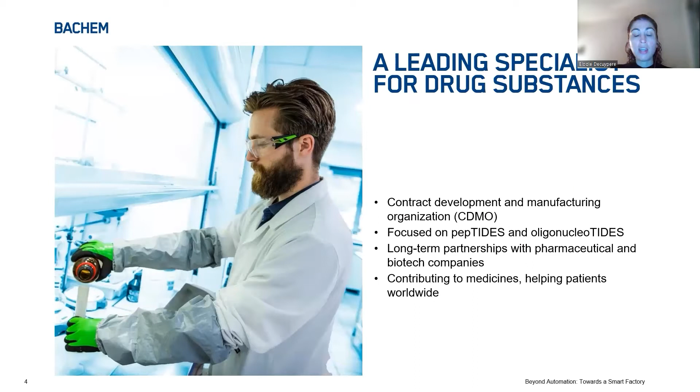Before we get into the topic, let me introduce Bachem. Bachem is a leading CDMO for peptides and oligonucleotide API manufacturing. Our success is based on long-term partnership with pharmaceutical and biotech companies to help them in contributing to medicine and ultimately helping the patients worldwide.

As a leader in our field, our success relies also on 5 strategic foundations. For today, we will emphasize in particular 2 of these 5: innovation and technology, because we aim to work with our customers to get the best solution for modern manufacturing. It is really important to us to continuously improve and keep a technological leadership. The second pillar we will highlight today is operational excellence and quality. At Bachem, we have a strong tradition of quality and efficiency, and for this and for our customers, we want to set high industry standards.

Bachem is a global company, and we are growing really fast. These past few years, we experienced an increasing demand for peptide projects as well as volume for this molecule. To address this and to meet the market demand, we invested heavily into new capacity and capabilities. End of last year, we obtained a capital increase, and we started the expansion and construction of new peptide manufacturing facilities. Our new building and equipment train for large-scale manufacturing of peptides will be ready by 2024. And in addition, we bought a new site in central Switzerland, in Eiken, that will be operative in 2030.

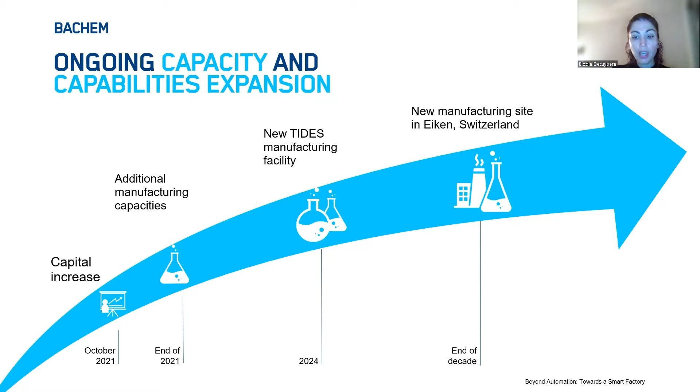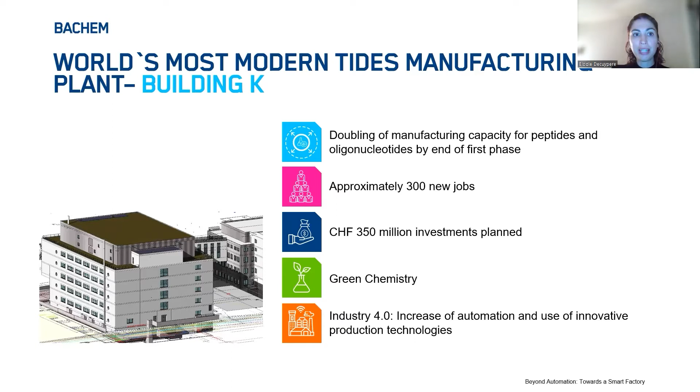With our new building under construction at our main site of Bachem at Bubendorf in Switzerland, when the first phase of commissioning is completed, we will already have more than double our manufacturing capacity for peptides. And when this building is fully operative, we'll be able to create 300 new jobs. We invested 350 million in this building with a particular focus on sustainability, with the implementation of green chemistry processes, as well as automation and digitalization, as you can learn later in this webinar with Patrizia. With this, I would like to thank you, and I hand it over to you, Patrizia.

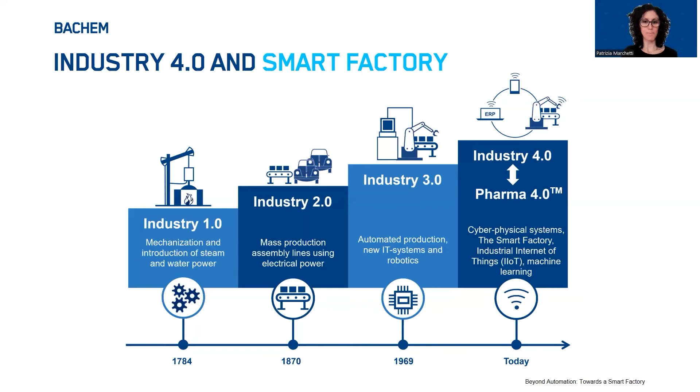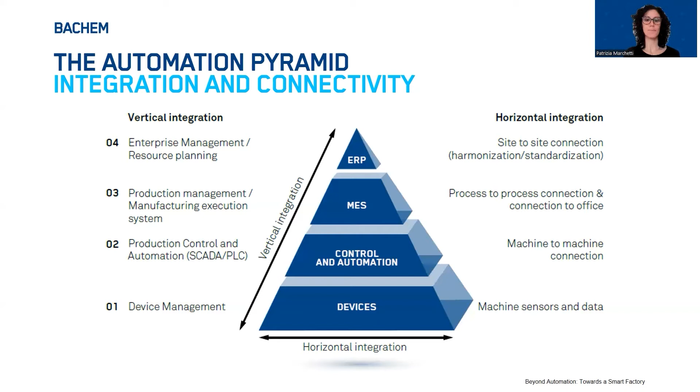At what we can consider the beginning of our journey, our production processes were either manual or semi-automated. In the semi-automated processes, some steps could be carried out without human intervention, and these steps were supervised by SCADA systems.

The data generated during the process was saved on local machines, which means it was very decentralized in so-called data silos. We introduced a few years ago a new enterprise resource planning system to support the management of our core business processes. We also introduced a laboratory information management system to support the operations of our laboratories and digitize the documentation towards a so-called paperless lab.

We have introduced process analytical technology in some of our processes to perform inline analytics and in this way streamline the processes. We will see one example later in this webinar on how we have applied PAT to substitute manual in-process controls. We continue with MES, Manufacturing Execution System.

This was implemented to digitalize the operation network and introduce digital recipes and paperless documentation. We will also see more about this later in this webinar.

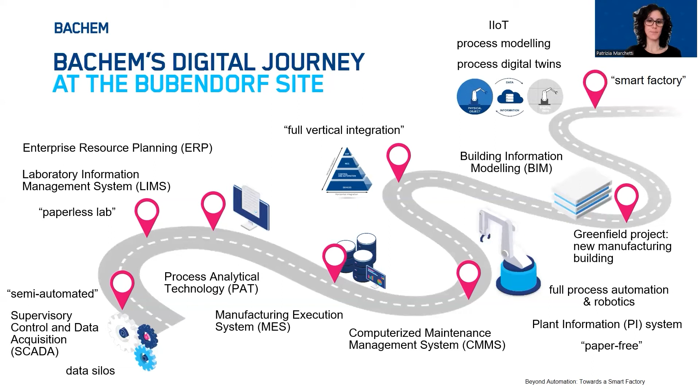I will start now presenting the project on automation and digitalization of the solid phase peptide synthesis. We selected the SPPS process as one of the first case studies for automation and digitalization because of its high business impact. SPPS is the core technology for us at Bachem for the manufacturing of both peptides and oligonucleotides, or shortly referred to as tides.

Peptides consist of chains of amino acid derivatives linked by peptide bonds. The desired peptide is obtained through successive reactions of the amino acid derivatives, one at a time, on an insoluble resin support.

The process consists of highly repetitive cycle operations, which take place in two main reactors: the SPPS reactor and the activation reactor. In the SPPS reactor, we perform the synthetic steps of deprotection, coupling, and acetylation, while in the activation reactor, we prepare the amino acid solution, meaning we solubilize the amino acid derivative and activate it prior to transfer to the SPPS reactor for the coupling step.

In this project, we targeted the mid-commercial GMP scale, so we are talking about 150 liter vessel size.

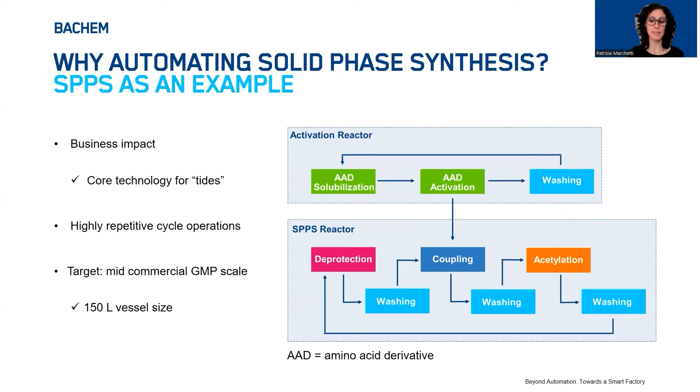The new fully automated process shows several benefits with respect to the state-of-the-art process. In the new process, operations are carried out with minimal human intervention. Specifically, we take time-consuming repetitive tasks out of employees' hands and let them be performed by machines. In this way, we allow employees to focus on higher value activities.

As a further benefit, the process is more reliable, reproducible, and safe, as we reduce the risks of human error and let machines perform critical or unsafe tasks. Equipment utilization is improved as we can use the machines 24/7 and over weekends. And thus, as a consequence, operating and personnel costs are also significantly reduced.

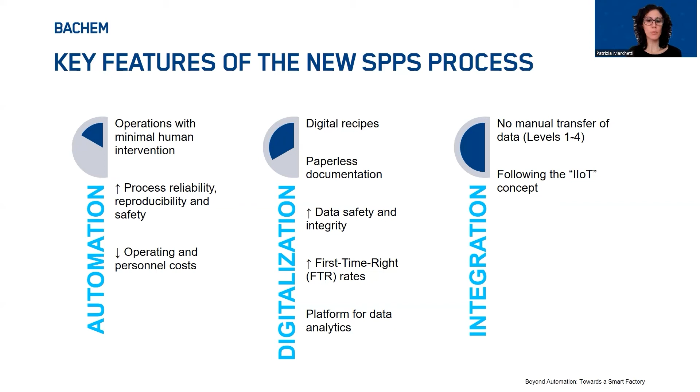By digitalizing our processes and digitizing data and documentation, we ensure higher data safety and integrity, we achieve higher first-time right rates, and we create a platform for data analytics. Through the interfaces between systems, data is transferred fully automatically, meaning that also these tasks, usually performed by operators, are now performed by machines.

Let's see now what we did, starting from the factory floor. From now on, you will find a small pyramid in the top right corner of the slide showing on which level we are. During the presentation, we will go from bottom to top.

On the factory floor, we introduced all required devices and controllers to perform all process steps. The controllers are supervised by two SCADA systems. Among the several steps, we found that the most challenging ones for automation were the steps handling powders, such as in our case, the solubilization and activation of the amino acid derivatives.

Before this project, these steps were performed completely manually. This means that an operator was manually transferring the powders from a bag into the activation reactor. To automate these tasks, we introduced one of the major innovations of this project, the first Bachem robot operator. We call it BALU, which stands for Bachem Amino Acid Loading Unit.

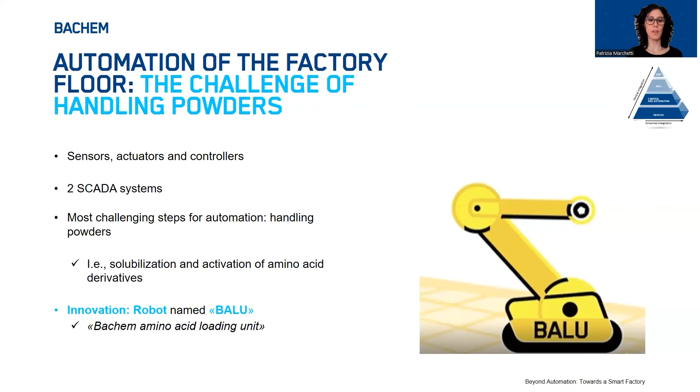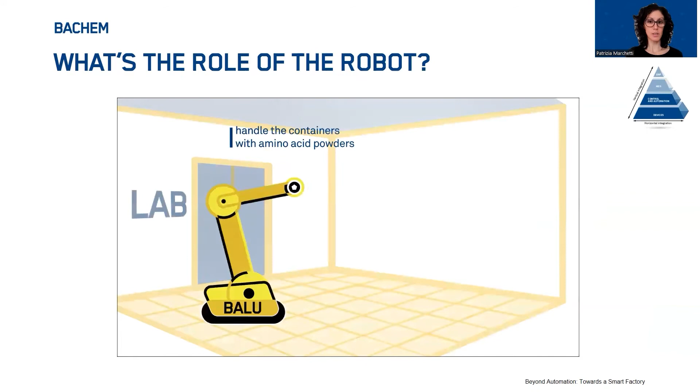So let's see what BALU does in detail. BALU can handle the containers with the powders, perform the powder transfer into the activation vessels, clean the amino acid transfer port after the powder transfer to prevent cross-contamination, and on the side, assist with the storage of clean and empty vessels.

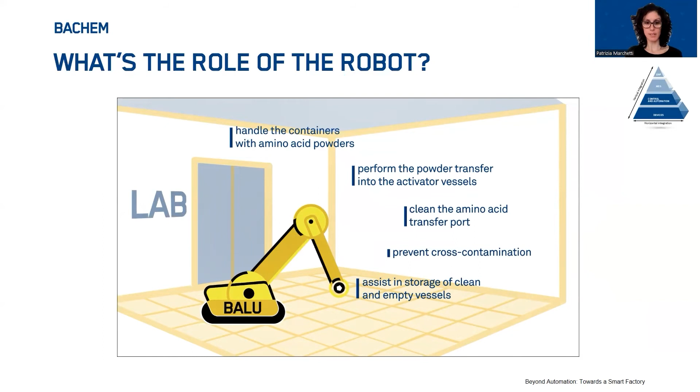Process Analytical Technology, or PAT, was also fundamental to achieve full process automation. We use PAT to monitor critical process values directly online and eliminate manual in-process controls. Manual in-process controls consist of several manual activities performed by operators on the factory floor and analytical chemists or scientists in quality control. Furthermore, they require the process to be paused.

On the other hand, by integrating inline sensors with the process control system, we can perform our analysis without interrupting the process. Specifically in this project, we successfully introduced PAT to verify that the starting materials have been completely solubilized, and that the starting materials or other critical reagents have been fully washed out from the reactor after specific synthetic steps. Thanks to PAT, cleaning cycles can also be automatically repeated if necessary.

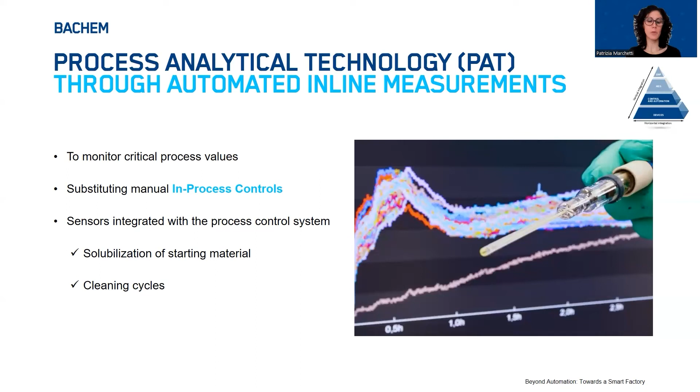We are now on level 3. On level 3, we use the PAS-X suite as a manufacturing execution system. With this software, we can define end-to-end processes, meaning from the dispensing of the raw material until the packaging of the final API. In MES, we make use of 2 specification types: master batch records as digital recipes for target materials, and equipment-related specifications for the management of equipment types.

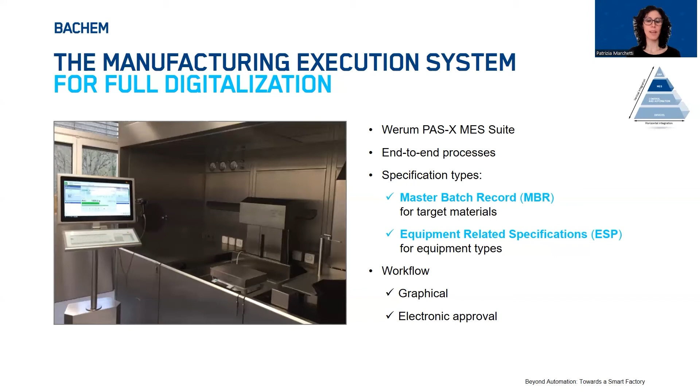These specification types substitute paper batch production records. MES features graphical workflows, which we design, approve, and execute fully electronically.

During the execution of the process activities, MES records all GMP-relevant batch data, such as process values, events, and alarms. Everything is documented in the electronic batch record, or EBR, which contains, beside header data, also information about the bills of materials, the basic recipe, and the equipment used.

One of the most impressive advantages of the EBR is the lean and faster review by exception process. This means that only exceptions are reviewed in the final batch documentation and not the whole batch documentation itself, as is the case for the traditional batch records.

To understand this with numbers, for the paper batch documentation, we need 2 to 3 production persons for the execution and 1 or 2 QA persons for review and release. For the EBR, we need 0, unless deviations occur.

In MES, we predefine exception types so that the system itself can automatically create the exceptions during process execution. And we can review exceptions in real time, meaning while the process is still running, for an even faster batch release at the end of the process.

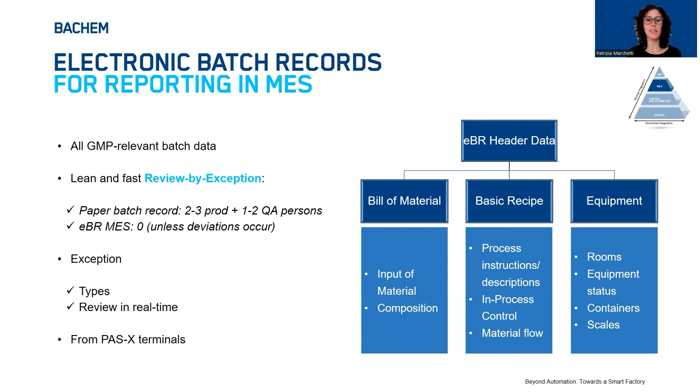During process execution, MES performs automatic status checks at specific time points of the process, as we define in the digital recipe. This ensures that we do not use dirty or non-calibrated equipment for subsequent production steps. With MES, we can also track the training status of the operators using the machines.

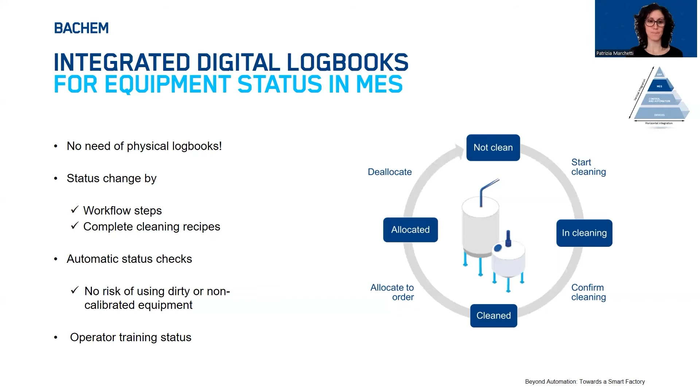After designing level 2 and level 3, so SCADA and MES, we had to plan the interface between the two and make some choices regarding the tasks of the two systems. The main question here was, how can the two systems work together to guide the process from the beginning until the end, so meaning from the coupling of the first amino acid until the coupling of the last amino acid, without any manual input along the way. In other words, the question was, how do we handle recipes?

To answer this question, we defined a 2-level approach consisting of an MES global recipe, the MBR, and several SCADA partial sub-recipes. The MES global recipe leads the process control system by triggering the SCADA partial sub-recipes, so starting them, and receiving information from them when completed, so that MES can start the next one. This is done for all the steps within one cycle to couple the first amino acid, and then for the second one, and then for the last one until the desired product.

The SCADA partial sub-recipes are defined independently from the batch, so they are modules usable for different batches. Examples can be deprotection, coupling, washing, and so on.

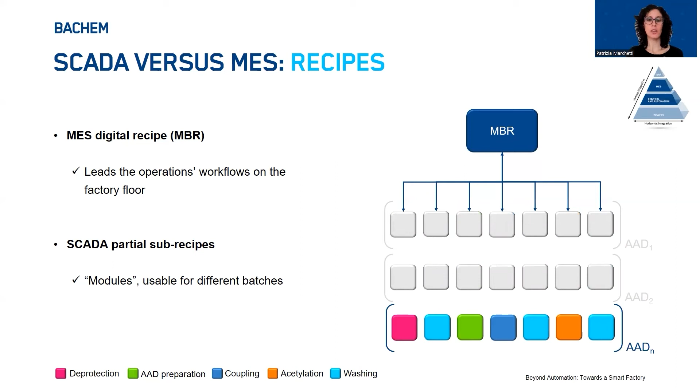SCADA sub-recipes need three types of parameters to perform their tasks. Basic function parameters, which are used by a specific SCADA sub-recipe, and global function parameters, which are global for all SCADA sub-recipes. These two types of parameters are batch specific and therefore defined in the MBR in MES and later transferred from MES to SCADA. Machine parameters, on the other hand, are system specific and are therefore set directly in the SCADA software.

We define tolerances for critical process values and alarms for exceeding these tolerances. Alarms are categorized by defining priorities. So we define which alarms have to be addressed immediately and which ones could wait. And also we define who is responsible to jump in if they happen.

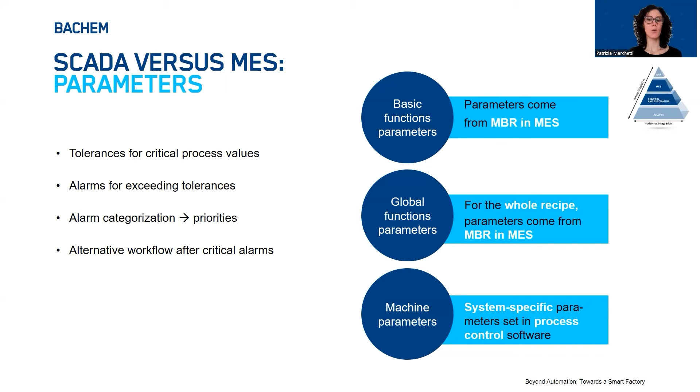In SCADA and MES, we have also created alternative workflows to be carried out after critical alarms, such as automatic emergency procedures.

For the cGMP management of our operations data, we use a plant information system, PI, or data historian. The PI system allows for real-time logging and long-term archiving of process data coming from the SCADA system. PI has interfaces with both SCADA and MES, with SCADA to receive the process data, as we just said before, and with MES to make data available so that MES can generate the electronic batch documentation.

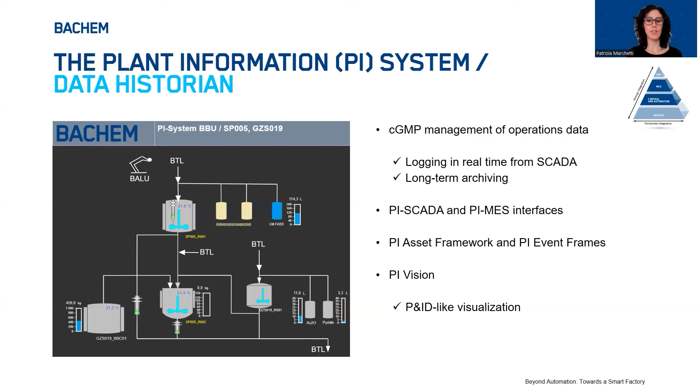In PI, we use the asset framework to organize and structure our data and the PI event frames to capture process events. We use PI Vision for remote monitoring of the factory floor so that we can comfortably visualize the plant, the equipment, trays and the rooms at any time from our office. And this through a P&ID-like user interface.

So in detail, on the Historian platform, we save all information needed by MES for the electronic batch record, but usually much more. So we save all set points, actual values, tolerances, alarms and warnings, deviations from the main recipe, such as emergency washing steps or manual emergency interventions.

We access this data for trending and batch-to-batch comparisons and generally for data analytics. So for example, to perform root cause analysis or a continuous process verification. We are also preparing interfaces for connection with external systems through which our customers can get real-time access to their batch data.

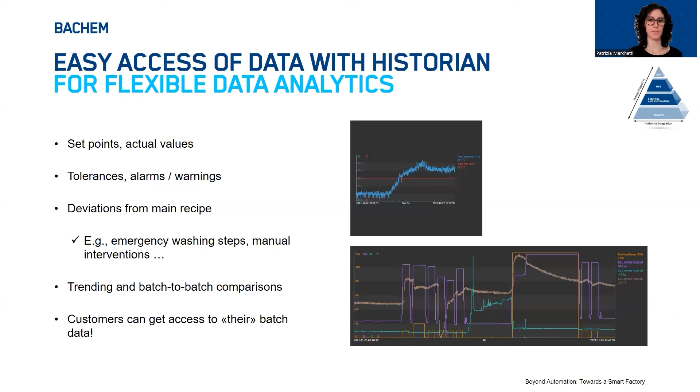At the top of the pyramid, we reach full digitalization by connecting the MES to our ERP system, SAP. Thanks to the interface to SAP, we can perform material verification by scanning barcodes. This allows us to check information on the material, such as material and batch numbers, batch status, and expiry dates, eliminating the risk of material loss or mix-up.

Furthermore, in SAP we execute process orders and create bills of materials. Thanks to the interface between MES and SAP, we can perform automatic takeout. During process execution, material has to be booked out when consumed. With a manual process, often two persons are needed, one entering information and one witnessing it. This brings risks of manual entry errors or rounding inaccuracies. So MES can do that automatically, having access to information on material consumption from the historian.

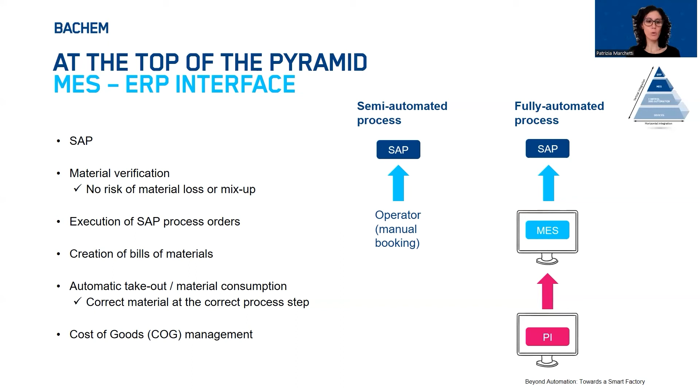In SAP, we also manage the cost of goods for our products.

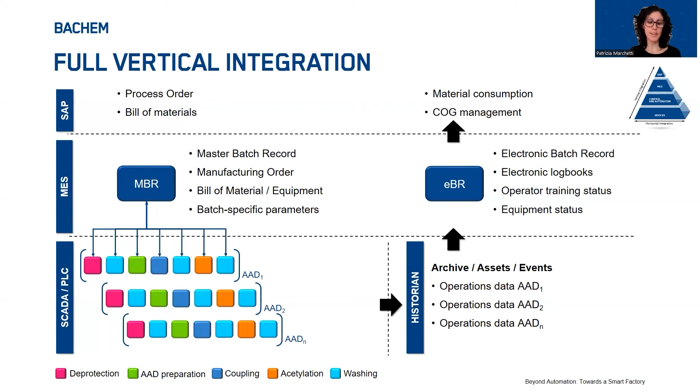This is how the full vertical integration of all the systems discussed so far looks on one slide. We go from the process order in SAP down to the MBR and the manufacturing orders in MES. MES then leads the operations workflow on the factory floor, which performs the required process steps to synthesize the desired product. Operations data is archived, organized, and visualized in the historian and made available to MES to generate the batch documentation. MES finally transfers the information on material consumption to SAP for automatic takeout and cost management.

The whole integrated system has been qualified, and all new computerized systems and interfaces validated. Specifically, we performed a regular change control for SAP, a computerized system validation process for the historian, MES, and interfaces, and our engineering qualification process for SCADA, PLC, and the devices.

An end-to-end test was successfully performed to assess the functionality of the whole integrated system. This end-to-end test consisted of the synthesis of a peptide at scale. The SPPS process is now fully qualified for automated and digitalized GMP production.

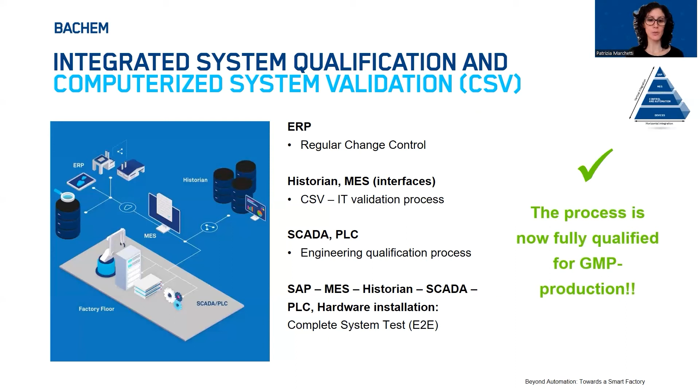Before we reach the end of this talk, I would like to quickly outline how we are moving forward. We are investing in the automation and digitalization of several other processes for the manufacturing of both peptides and oligonucleotides, for example reactors, filtration systems, lyophilizers, solvent tank farms, and batch and continuous chromatography.

Continuous chromatography is another example of innovation at Bachem. We learned in a recent webinar about how Bachem has already successfully performed its first large-scale purification using continuous chromatography. If you missed it, you can find the recording in our virtual showroom, Bachem 360.

Back to our digital journey, we are establishing common platforms for data collection and analysis, such as the historian and MES that we saw in the example before. On the factory floor level, we are working on harmonizing the control systems and devices whenever possible and advantageous, so we can learn from experience and make use of similar protocols and communication technologies.

We are also continuing with our implementation of smart sensors and process analytical technology to benefit from integrated inline analytics. And finally, we want to model our processes to better understand our assets and to be able to predict future performance.

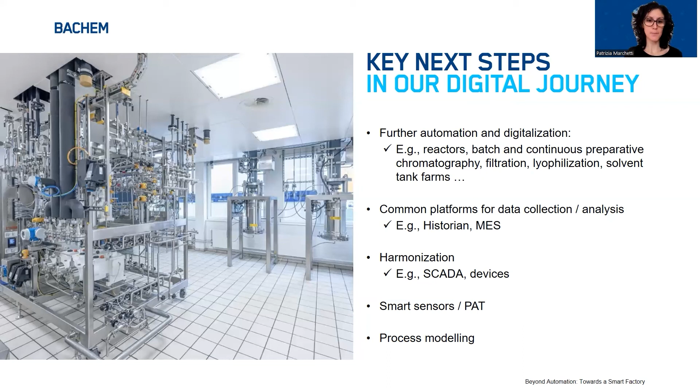And that brings us to the end of this webinar today. Let me close this presentation with a summary of the key points we discussed.

At Bachem, we want to embrace a smart future together with our customers. As we saw in the case study presented before, we have implemented a new level of automation and digitalization for the SPPS process, and we want to further expand on this.

The key benefits of our transformation journey are optimized production efficiency to boost our capacity, and in this way be able to respond to increases in demand from our customers; digitalization and digitization to simplify compliance and improve our first-time-right rates; reliable and safe processes, always offering consistent API quality; and last but not least, agile and flexible production to meet our customer needs.